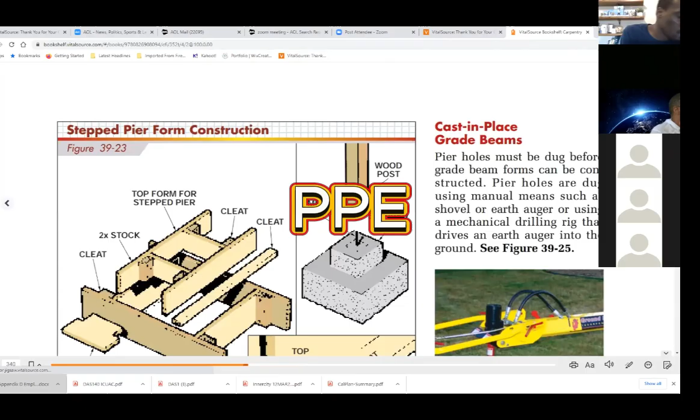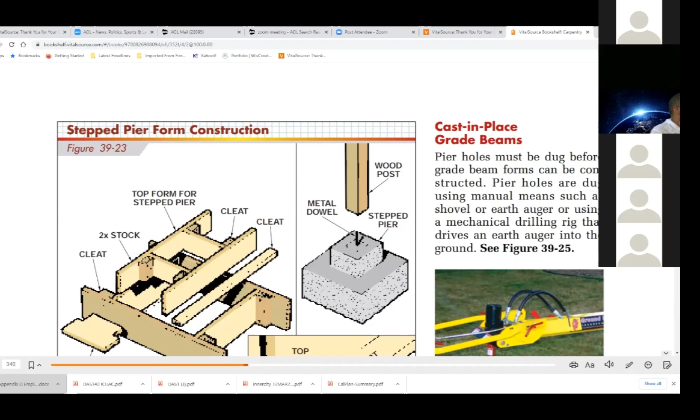They got a request for more apprentices. Okay, well, yeah, they keep me busy. That's good. Well, keep your hours so you get your raises. You guys should be turning in your blue book. What's up, Mr. Springfield? My LA brother. All right.

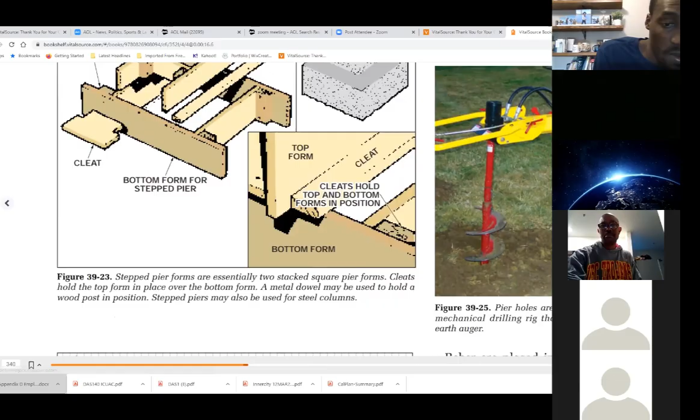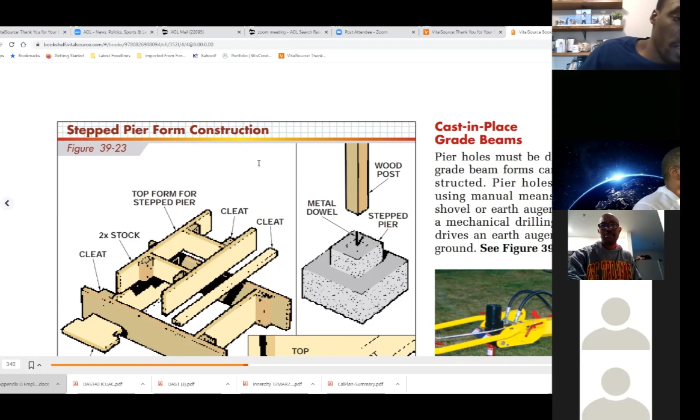So what I want to do, gentlemen, can everybody see my screen? Right? Yes. All right. I had a class I was teaching the other day, which was dealing with form setting.

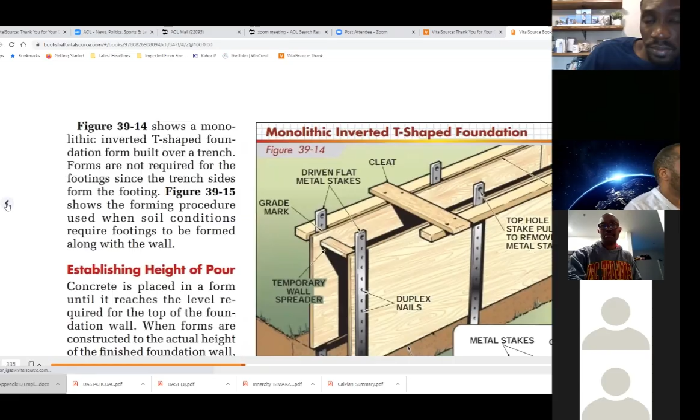And we were dealing with some vocabulary here. This is foundation design forms. And we got foundation design form construction. And so it's where it all starts.

You know, when they talk about the significance of the carpenter, he is the most essential person in the trade. Nobody can run wires, nobody can put plumbing pipes, nobody can put insulation in walls, set windows and doors, unless you have a carpenter that's going to build the structure.

And he starts from the foundation to the turning of the door knob when the job is through, and I'm giving the keys to the owners. That carpenter is a very important person. And so you should learn all the trades that are available to you. Even though you might be a specialist, like a structural concrete form setter, you want to be versatile. This apprenticeship program allows you to learn the different trades.

So here's some things, because I've been around 40 plus years in this trade, and there's always something new that you're going to learn because you haven't been in that particular industry. I can't really tell you how to set T-bars and put a laser up and drop a drop ceiling in, but I can cut stairs and I can do several other things.

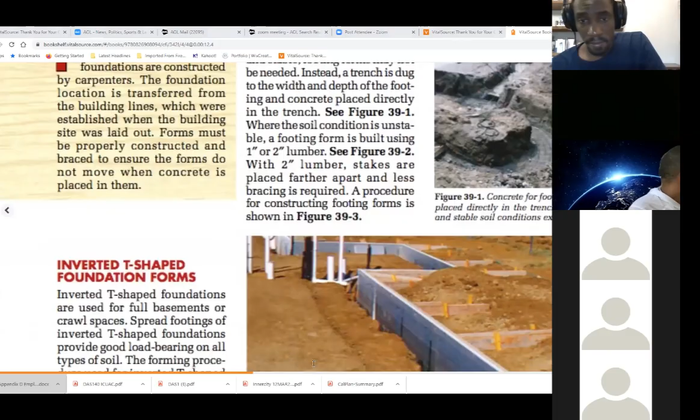So let me let my friend kind of - let me get this out of the way here. We got this. And where's my friend here? All right.

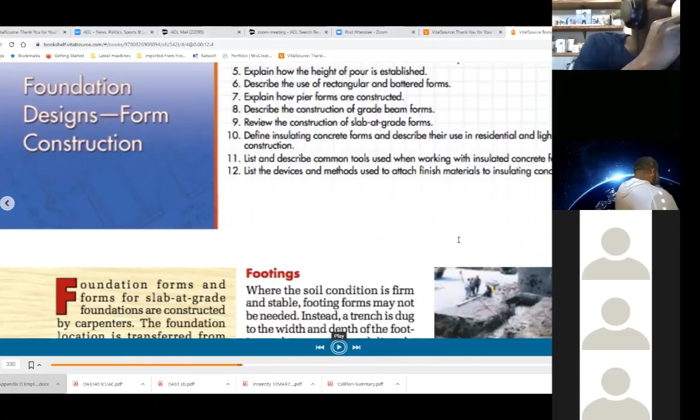Somebody's got their phone on. You got to mute it. You got a little background noise in the background. I think that's Isaac. I got some background in the background. Thank you. All righty.

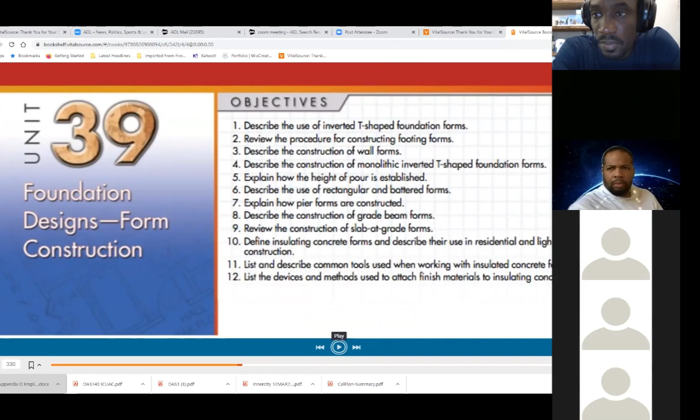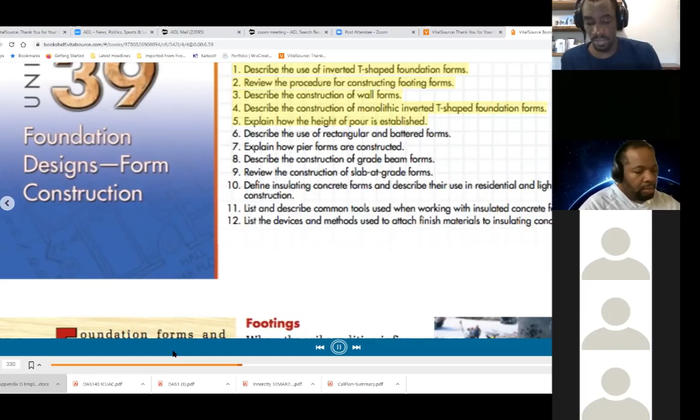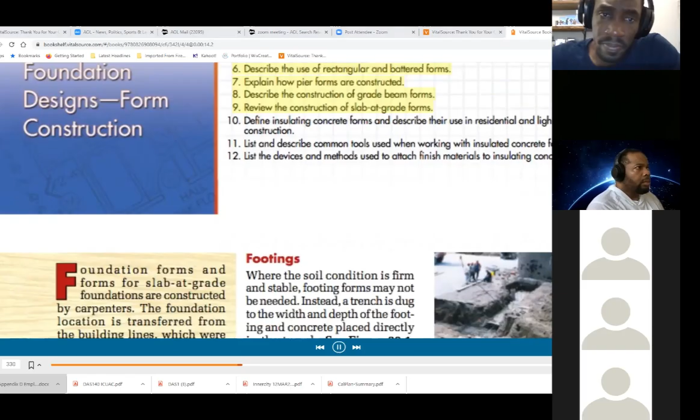Let me see something here. 1. Describe the use of inverted T-shaped foundation forms. 2. Review the procedure for constructing footing forms. 4. Describe the construction of monolithic inverted T-shaped foundation forms. 5. Explain how the height of pour is established. 6. Describe the use of rectangular and battered forms. 7. Explain how pier forms are constructed. 8. Describe the construction of grade beam forms. 9. Review the construction of slab at grade forms.

What, anybody know what a grade beam is in foundations?

Okay, I think we had that in lesson 1.

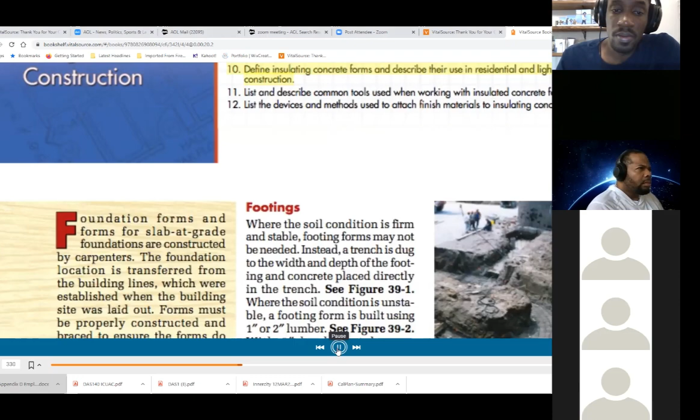10. Define insulating concrete forms and describe their use in residential and light commercial construction. 11. List and describe common tools used when working with insulated concrete forms. 12. List the devices and methods used to attach finish materials to insulating concrete forms.

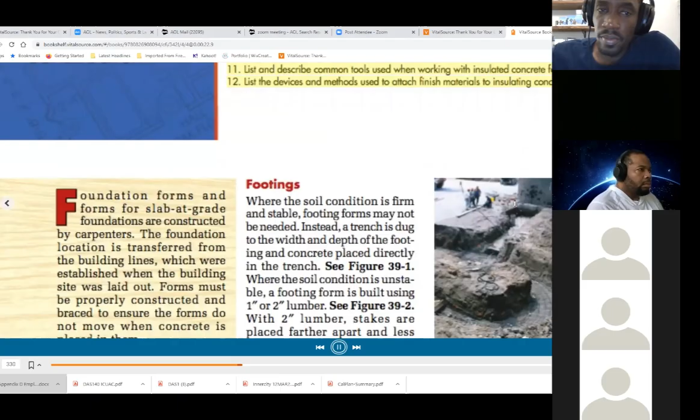Inverted T-shaped foundation forms are used for full basements or crawl spaces. Spread footings of inverted T-shaped foundations provide good load bearing on all types of soil. The forming procedure used depends on the climate, soil condition, and height of the foundation walls. For low inverted T-shaped foundations, concrete for footings and walls is placed at the same time, or monolithically.

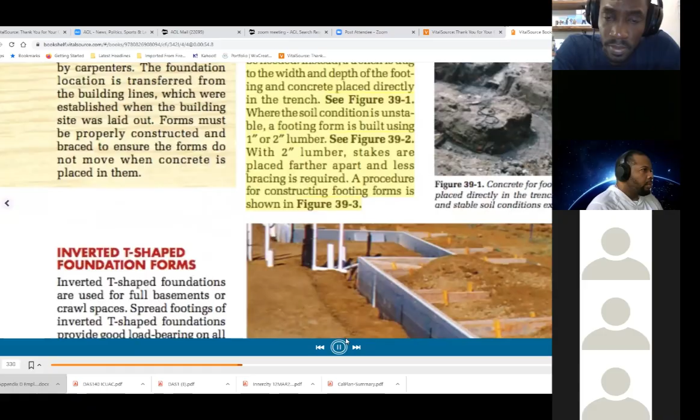For high inverted T-shaped foundations, concrete for footings and walls is placed separately. Figure 39-2: footing forms may be required on one or both sides to contain concrete when the soil condition is unstable. Footings: where the soil condition is firm and stable, footing forms may not be needed. Instead, a trench is dug to the width and depth of the footing and concrete placed directly in the trench. See Figure 39-1. Where the soil condition is unstable, a footing form is built using 1-by or 2-by lumber, see Figure 39-2. With 2-by lumber, stakes are placed farther apart and less bracing is required. A procedure for constructing footing forms is shown in Figure 39-3.

Figure 39-1: concrete for footings may be placed directly in the trench.

Now, if you look at these footings right here, it's a little different from what you see on a foundation. A footing basically has a base, which is the footing, and then it has a little wall that comes up, like the stem wall. This is a footing, and the ground is here, under the ground at this point level.

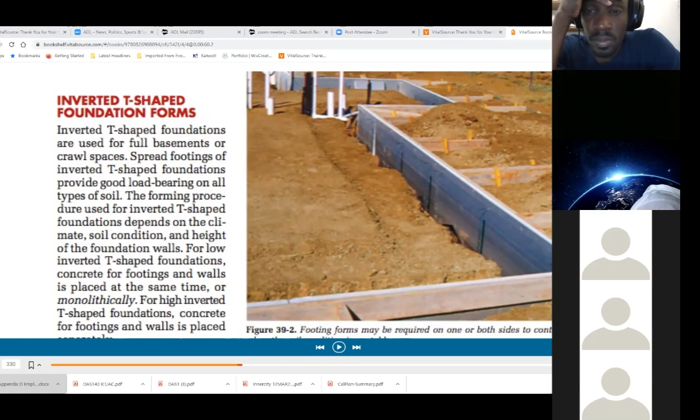Now, what's required when you're building a house is a minimum of 8 inches above the grade from earth to wood contact. So from here to here, we have to have 8 inches. Then there's the joist that goes on top if this is a conventional floor, and then a 2x4 stud wall that goes above it. Then you have a clearance of a minimum of 18 inches for the crawl space under the house. This is all for moisture and termites.

So this is what they commonly call a footing. That footing is a minimum of 12 inches by 12 inches deep, and this is what the foundation of a house sits on. So everything we build, the first thing you do when you lay out a footing, there's a formula to make sure the building is perfectly square.

Anybody know the right angle of a triangle? What is the hypotenuse? 3, 4, and 5. That gives you your 90-degree angle right here. This is 5, this is 3 over here, or 4, and 5. So when you're laying that footing out, you also want to pull a diagonal tape to show that you've got 100 feet this way and 100 feet this way.

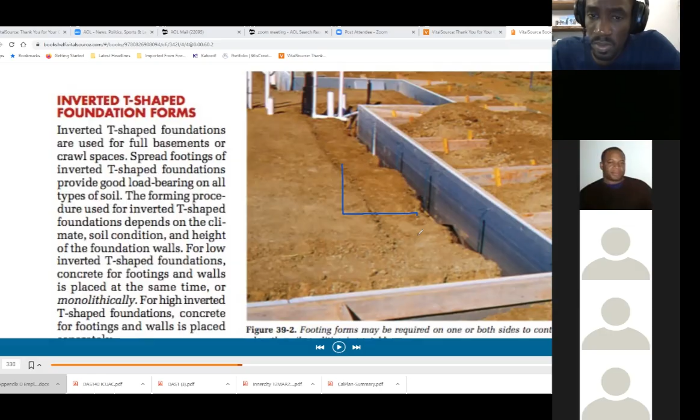It doesn't make a difference if I'm coming in here with a building that has these kinds of shapes on it, going up this way and coming back over here and back this way. Here is my ridge and my roof - this is a gable end roof, which would be coming here, California fill, which would be here, and this roof ridge comes this way. So this is the ridge of the roof, this is the peak of the roof. When I'm looking at this roof, it's going out like this, and so forth. Everything has to start with one corner, 3, 4, and 5,

or 6, 8, and 10, for pulling longer forms.

This is part of the most important part of it - understanding the foundations. You want to figure out why your doors are fitting, your windows are fitting, and your building is level. Well, that starts with the guy that sets up the concrete foundation. It's not the concrete guy, but it's the carpenter.

In this instance, we're looking at these boards that are here. Come on up here now. These boards pointing down into the ground are called footing forms. So what they're doing is running 2x6 here, and nailing them back across here. So that wood is kind of sticking out like this, and they're putting stakes in the ground back over here.

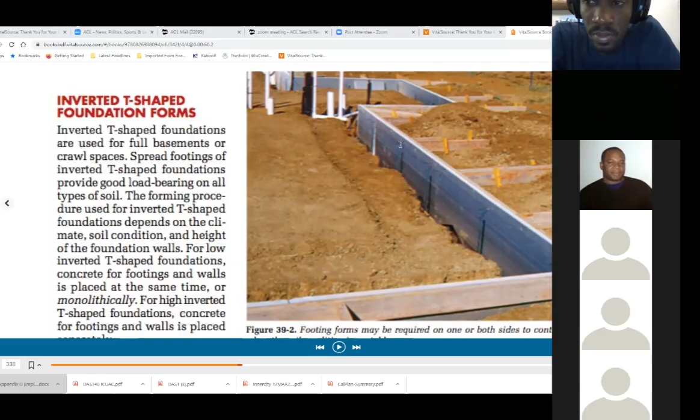So this is one of their foundation form setting techniques. You want to learn a little bit about foundations, understand what's important. Even if you become a general contractor, or you're a specialty trades guy putting in HVAC, suspended ceiling, or flooring, you want to make sure that guy is laying out your slab right. So when you get ready to do your job, you don't have the wood going off square, and you have to start making special cuts to accommodate everything. So read on down, firm bearing

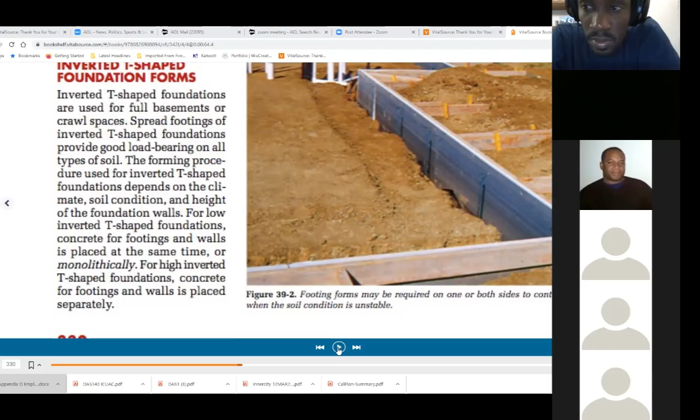and stable soil conditions exist.

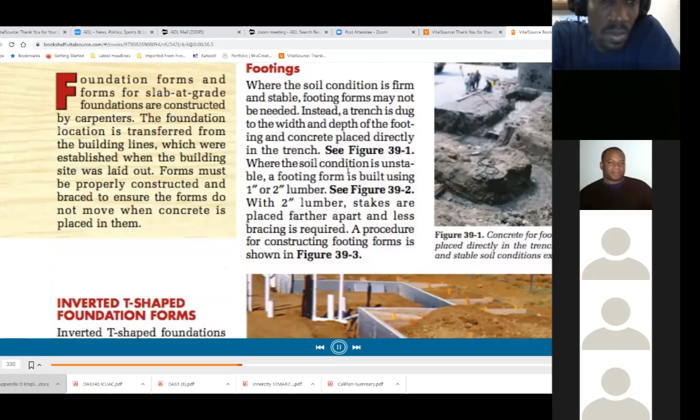Foundation forms and forms for slab-at-grade foundations are constructed by carpenters. The foundation location is transferred from the building lines, which were established when the building site was laid out. Forms must be properly constructed and braced to ensure the forms do not move when concrete is placed in them.

So what we have, he talks about following the property line. When a guy basically buys a lot, your lot is 50 feet by 100 feet. Now the guy next door, he has a lot that's also 50 feet by 100 feet. And this is the property line. The property line is here, so you have your property line.

You want to make sure you don't put your house too close to his property line, because the setback says you got to be 4 feet apart. So he's got 4 feet and you got 4 feet, so between your house and his house is 8 feet. So if your house catches on fire, the likelihood of his house catching on fire will be slimmer, because you have a distance of 8 feet between the two of you.

So when you're laying out this foundation, you got to make sure that you follow the layout from the guy that did the surveying of your lot. He puts these hubs down, these points, giving you a little point in the ground to show you this. Then you got to pull a string straight through, and you got to stay back. If the back property line says you can't be more than 30 feet away from the back yard, you keep 30 feet in the back, and in the front yard you got 15 feet. So your house has to stay within the boundaries of 15, 30, and 4.

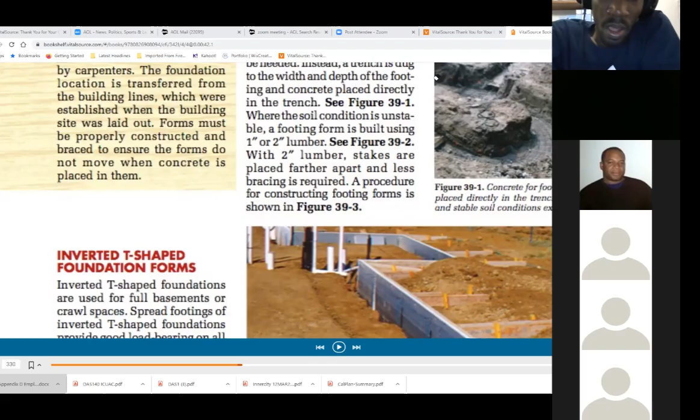Batter boards are something that stays in the ground permanently during construction. So if you get out of square, your string goes down, gets dropped, you just hook it on that nail pulling parallel to your property. If you have a batter board like this, you have a nail right here pulling 4 feet from that property line, and another nail back here pulling 30 feet from the back of the property line.

So what you're going to have is, when you start putting your square and your building up, 3, 4, and 5 - you're 30 feet back and 4 feet on the side. That's where you're laying out your wall, your building foundation. So when you get to digging and trenching, the digging ain't gonna be all straight, but you have that string that pulls straight through, and when you put that form on there, you have a nice straight footing and foundation wall.

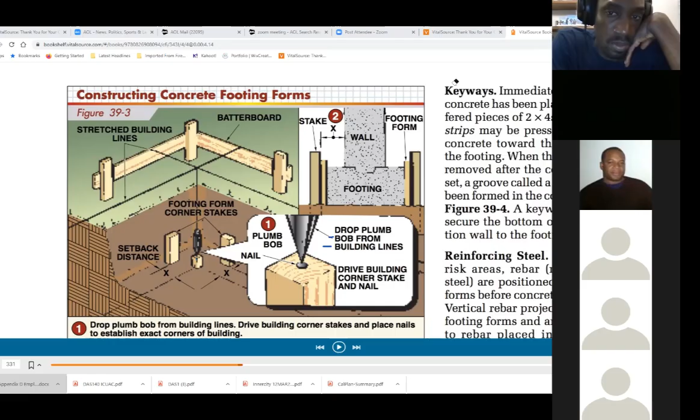So we got that, and let's see, so we have all this in shape. And what we got - let me get rid of these. So I'm gonna let him tell me a few things, and we're gonna jump in. Me and Ronnie gonna jump in and put him straight, because I know Ronnie knows.

And how deep does that keyway have to be? Keyway is usually 1.5 inches by an inch and a half thick by 2 inches wide, and it's basically taking a 2x4 - you take a 2x4 that's like this, cut it at an angle, cut it like this, and you lay it in the concrete when it's wet, right?

So it's laid in the concrete or either staked out in place so it holds that footing. And then you got steel coming up and hanging through the top of it, but this keyway is here, so you have holes where the steel comes through it. So when you pull this up, not only is the keyway going to lock that concrete from moving, but the steel that's in there is kind of tying them together, right?

So we're gonna give them a definition. Give them the definition of keyway. Keyway is a tapered groove. It's formed in the concrete. It's used to interlock concrete placements that are made at different times. You never know when they make the keyways—they make them at different times and different stuff.

That's right, that's right. Go ahead there, co-teacher. All right, no, you gotta bring back. I got to bring back, man. Yes sir, so go to the book.

Bible says study the book and show yourself approved. So it's important that you guys understand the nuances of building, the nuts and the bolts. You're not just going to be a carpenter, a form setter, a window man, a doorman, or a cabinet guy. You're going to know how to build it and how to run a business, because you might want to diversify. Things are getting slow, you want to get out there and be a master framer. This is what this is all about. So we're here to kind of take you along this road. I'm gonna let my fella here talk for a minute and see what he's got to say.

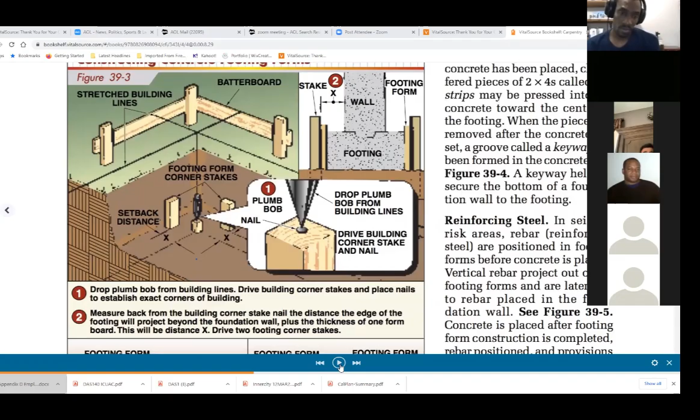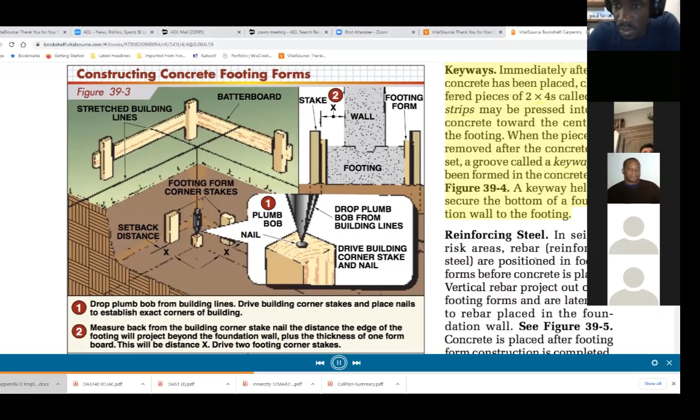Constructing concrete footing forms. Keyways. Immediately after the concrete has been placed, chamfered pieces of 2x4s called key strips may be pressed into the concrete toward the center of the footing. When the pieces are removed after the concrete has set, a groove called a keyway has been formed in the concrete. See Figure 39-4. A keyway helps to secure the bottom of a foundation wall to the footing.

Reinforcing steel. In seismic risk areas, rebar, reinforcing steel, are positioned in footing forms before concrete is placed. Vertical. All right, what is a seismic risk area? Anybody?

This house is made of brick. This house is made of wood. And this one is made of straw. I'll huff and I'll puff and I'll blow your house down. So if you're down there in Florida, Miami, you got to have houses that are made of brick.

So it's like reinforcement with rebar? Seismic load is what, reinforcement rebar? Well, that's what you do, that's what you got to do. And you also need to do it down in the brick buildings down there in the Florida Keys and things. But seismic load is earthquakes. So we have earthquakes out here in California, so we make houses made of wood so they can kind of sway a little bit. Now down there in the deep dark jungles of the Pacific Islands, you can have a straw built house because all you got is rain coming down on your head. You ain't got no wind blowing, not necessarily, and you don't have the ground shaking, not necessarily. So you can make a house made of straw.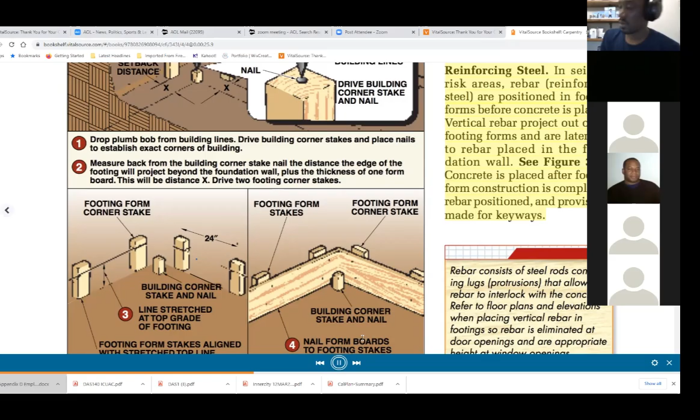Vertical rebar projects out of the footing forms and are later tied to rebar placed in the foundation wall. Foundation walls, see figure 39-5. Concrete is placed after footing form construction is completed, rebar positioned, and provisions made for keyways. Rebar consists of steel rods containing lugs, protrusions, that allow the rebar to interlock with the concrete. Refer to floor plans and elevations when placing vertical rebar in footings so rebar is eliminated at door openings and at appropriate height at window openings.

Walls. Form walls are erected after concrete for the footings has hardened and set. Bottom plates are fastened to the fresh, green concrete as a base for the outside form walls of either job-built or panel forming systems.

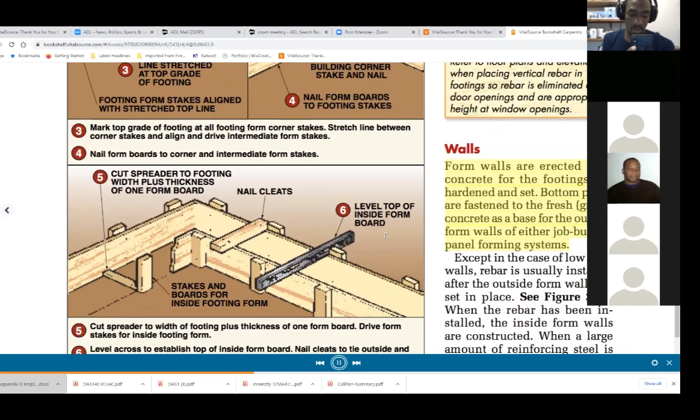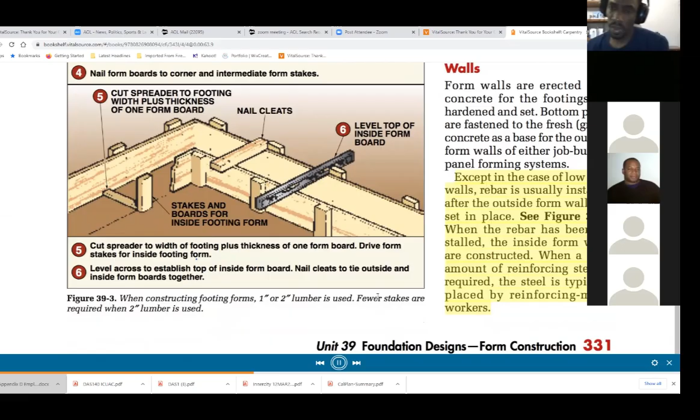Except in the case of low-form walls, rebar is usually installed after the outside form walls are set in place. See figure 39-6. When the rebar has been installed, the inside form walls are constructed. When a large amount of reinforcing steel is required, the steel is typically placed by reinforcing metal workers.

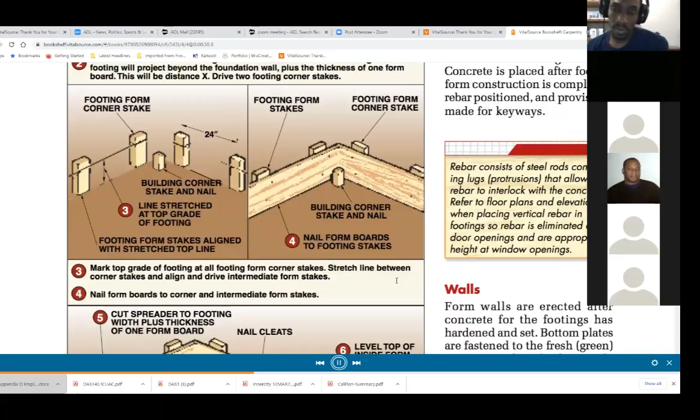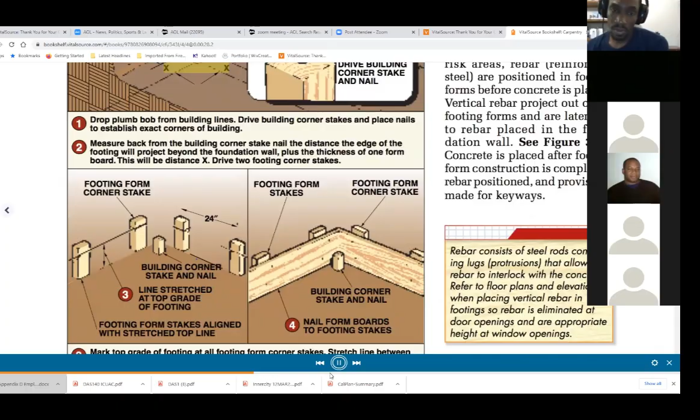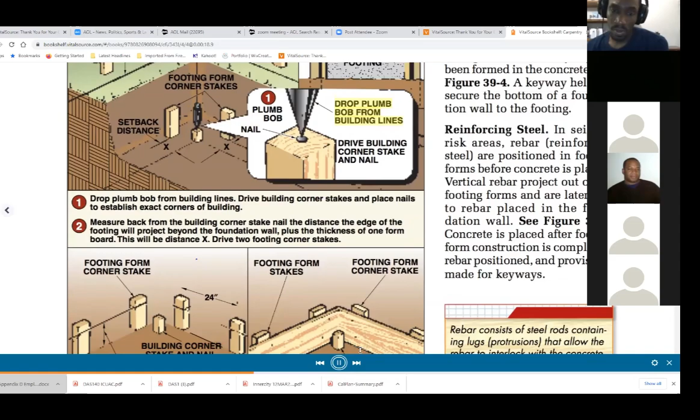Figure 39-3: Stretched building lines. Batterboard stake to footing. Form. Wall. Footing. Setback distance. Footing form corner stakes. Plumb bob. Nail. Drop plumb bob from building lines. Drive building corner stake and nail.

All right, let me explain this diagram that he's talking about. Basically, what I just went over, we went through figure 39-3, which is the stretched line of the building.

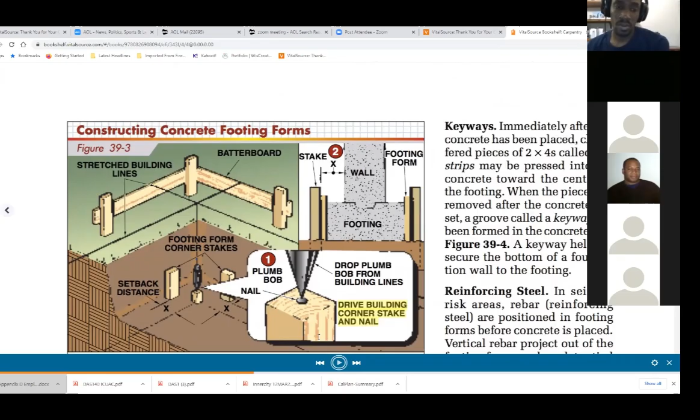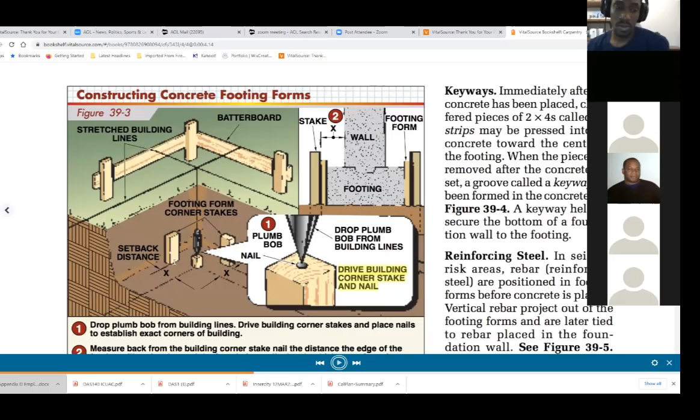This is the outside of your building, where the building is actually going to stop and start. So you've got a line stretched over here, and then he's talking about the plumb bob, which is basically centering where that wall is going down, almost like a basement. Then he has a setback distance, which is where the form is starting, because they want to make sure that the form is setting straight.

Now here, in this corner building stake, he's doing something kind of rudimentary. They've got a stake in the middle and he's going both ways, putting it in the ground. It's a little different - footing stakes on the outside.

You usually, when you're gonna put a form down there and you've got that string down this way, you put that footing stake right up on that string. You want to stay straight with that string - you don't want to come out this way a little bit, you don't want to go out a little bit. You want to stay right up along that string, so when that concrete pours, it's nice and straight. So when you're sighting down the wall, you're sighting straight on down that wall. So you want to create your stakes.

Putting foundations in is a very rewarding challenge, and you're making sure that it's square and plumb, you want to also make sure it's level. So you want to make sure that the form is not high over here and low over here, so that concrete slab isn't out of square.

So you're shooting with a grade, with a laser level, shooting the same point, the same way you do when you put in suspended ceilings. You want that suspended ceiling to be perfectly level, so you have 8 feet of suspended ceiling from floor to wall, 8 feet over here.

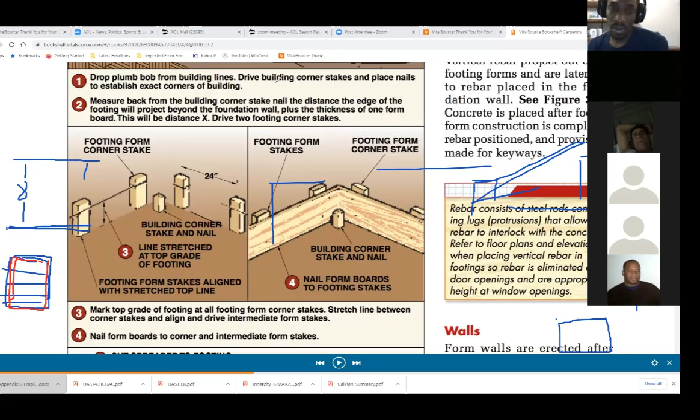We got some input. So what you got to do? Sorry about that, Mr. Mead.

So that carpenter is the guy where the buck stops - that foundation setting, and then the guys that lay the wall. I don't know, are you guys able to back charge for screwed up stuff? Because it takes you more time now. You got to spend time straightening out stuff and playing with it, when normally you could have just jumped in there and jumped out.

No, they be having people on site, you know what I'm saying? If something's wrong, they'll hurry up and abate it, hurry up and fix it. You know what I'm saying? Concrete form, they don't play like that, because here come the wood framer right after the foundation. They laying right after them, and they coming real quick too. That's right, so that framer doesn't want to be having to cut every joist and every sheet of plywood because of the damn foundation guy.